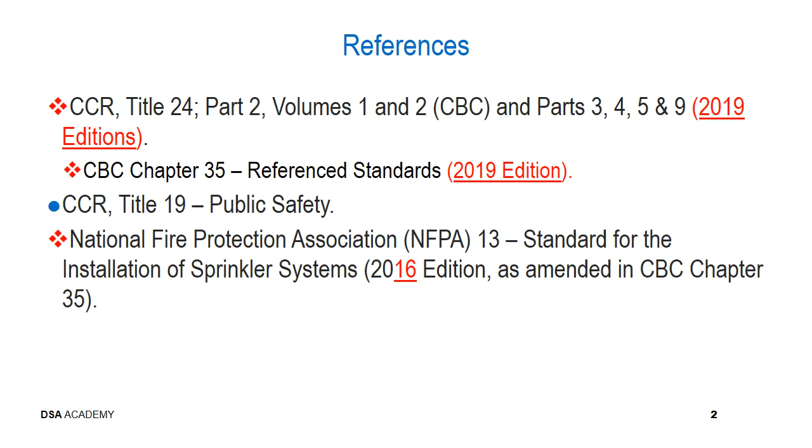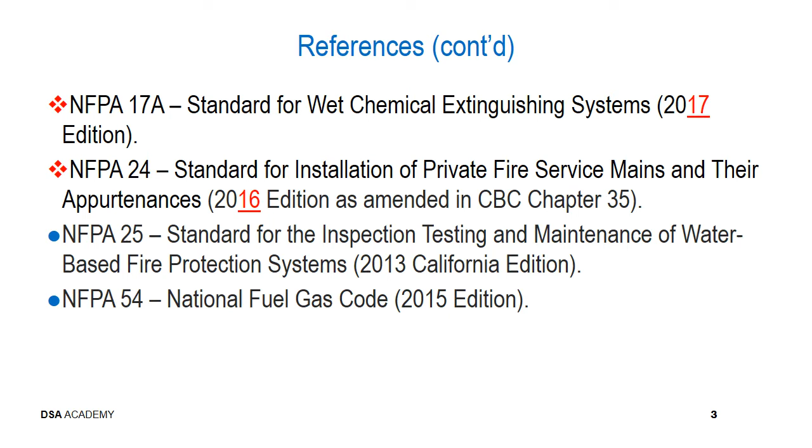There's also now an NFPA 17A, the standard for wet chemical extinguishing systems. There's a 2017 edition. For NFPA 24, the standard for installation of private fire service mains and their appurtenances, there's a 2016 edition, which is amended in the CBC Chapter 35, similar to the NFPA 13. With regards to the NFPA 25 and NFPA 54, those are the 2013 and 2015 editions.

There are some new editions for these remaining references. The NFPA 72 is a 2016 edition, and the NFPA 80 is a 2016 edition. And there's the NFPA 1142, that's a 2017 edition. Technically, NFPA 1142 is not officially adopted in the CBC, but it is recognized as a national standard in the industry.

Regarding the fire department's role, there's a document on the DSA FLS web page that deals with the roles and authority of DSA and the local fire authority and the state fire marshal. It would be good to have a copy of it and be familiar with the content. This is available on our website and can be pointed to should you have interactions with a local fire authority on a project in which they're asking questions about DSA's role for the construction on that project.

With regards to the 2019 CBC format, many of the FLS-related subject areas were reformatted to be consistent with the 2018 IBC. So at first glance, it may appear as if previous code provisions have been deleted, when in actuality they've been relocated to other sections or renumbered, similar to some of the other sections already covered. For example, many of the provisions formerly in CBC Chapter 14 related to exterior walls have been relocated now to Chapter 7.

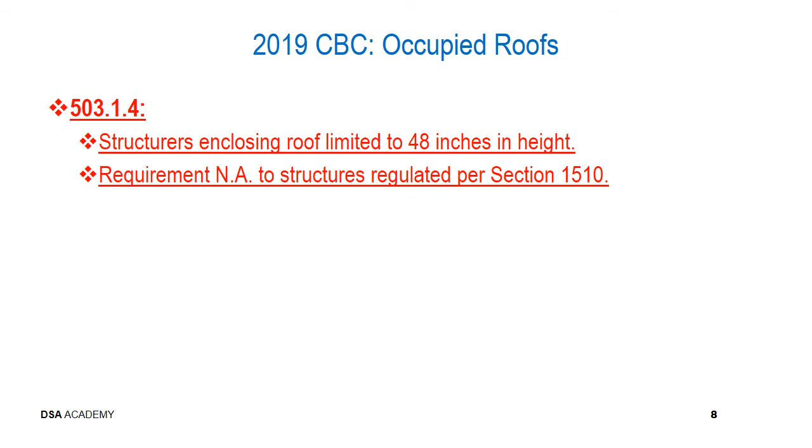With regards to marking and identification on rated walls, in 703.7, there's been no changes compared to the past code. Fire walls, fire barriers, fire partitions, smoke barriers, smoke partitions, or any other wall required to have a protected opening or penetration shall be effectively and permanently identified with signs or stenciling. Of course, the overall intent of this is to discourage installation of unprotected openings or penetrations in these rated walls.

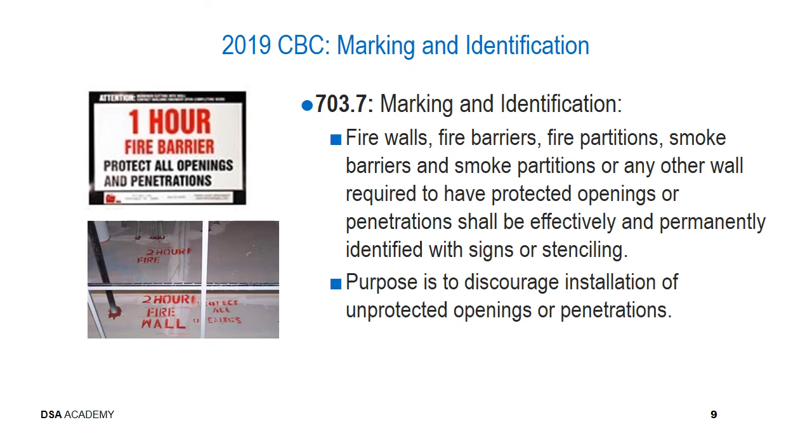The requirements for the frequency are the same as before. They're required at 30-foot maximum intervals and minimum of 3-inch letters. First, they identify the type of wall, and then the words "fire and smoke barrier - protect all openings" are required on the sign. These signs are installed to warn workers for maintenance and remodeling activities. A note must be in the specifications or on the plans indicating that this requirement will be met. You as project inspectors need to verify that it has been provided.

Continuing on with the marking and identification, this stenciling is required at all the accessible concealed spaces, and the wall type must be specified in this identification. It must state what type of wall it is, and must state that information previously mentioned about fire and smoke barriers and protecting all openings.

There are also requirements with regards to the text and font that's used. It's minimum 3 inches high with 3/8-inch thick stroke letters, color contrasting with the background. And we already talked about the spacing needing to be at 30 feet on center and 15 feet from the ends of a wall or partition measured horizontally.

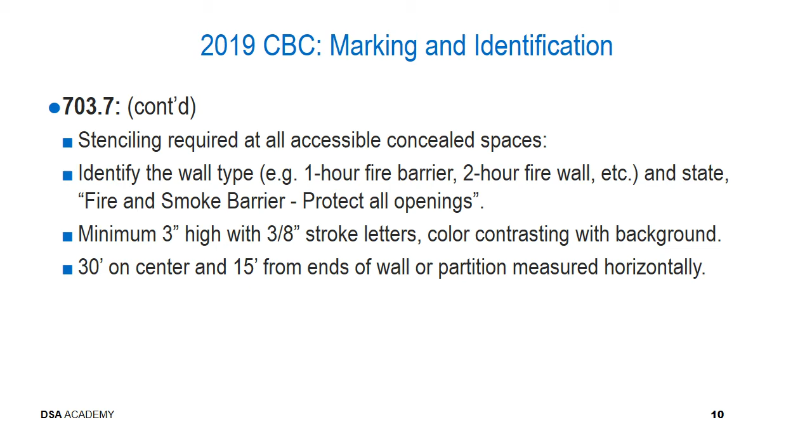With regards to secondary attachment to structural members and fireproofing or fire protection, 704.6.1, secondary attachments to primary and secondary structural steel members must be protected with the same fire resistive material and thickness as is required for the primary structural members. And this protection must be extended at least 12 inches minimum away from that primary structural member.

If those attachments are hollow and have open ends, then the fire-resistant material and the thickness must be applied to both the exterior and interior of that hollow attachment. We'll talk about this a little bit because of what it seems to imply. These new requirements clarify past uncertainties regarding whether fireproofing was required for these secondary members, and if so, how much, when those secondary members are connecting to primary ones that require such fire protection.

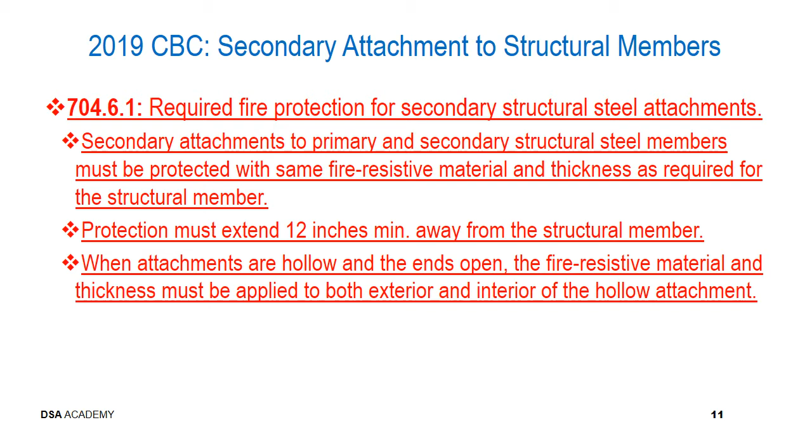Though the section indicates requirements for exposed open hollow members, how this will be practically implemented, specially inspected and tested, remains uncertain for small hollow members. Think about that. It's likely that contractors will elect to simply slap on an enclosure plate or maybe completely fill the opening with fireproofing to get away from dealing with those situations.

With regards to vents, 705.2.3.2, sealing at vents required in fire resistance rated exterior balconies or elevated walkway surfaces per section 2304.12.2.6. Any voids that are created at the exterior curtain wall intersections with balcony floors must be sealed to retard interior flame spread or hot gases or other products of combustion.

This new requirement is due to some fires over the last several years that occurred on exteriors of buildings that led to smoke and hot gases or other products of combustion that, unfortunately, entered the interior of the building through these vent spaces. Recall that 2304.12.2.6 requires vents of 1/150th of the enclosed framing area. So it was through these vents and voids at exterior curtain wall intersections with balcony floors, and this is what led to problems and therefore this new code requirement.

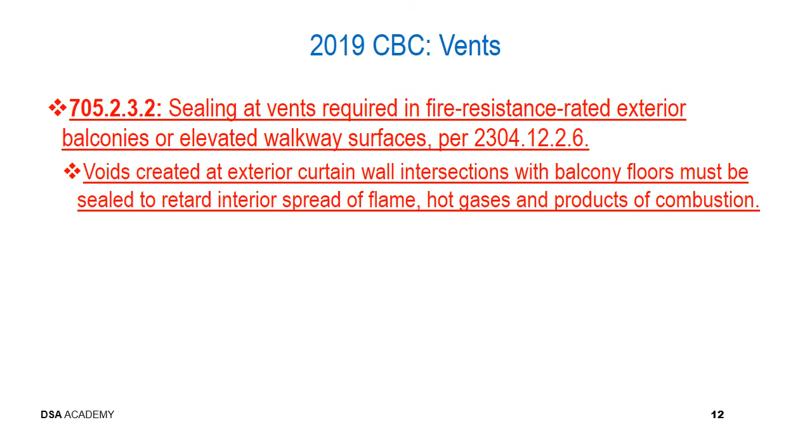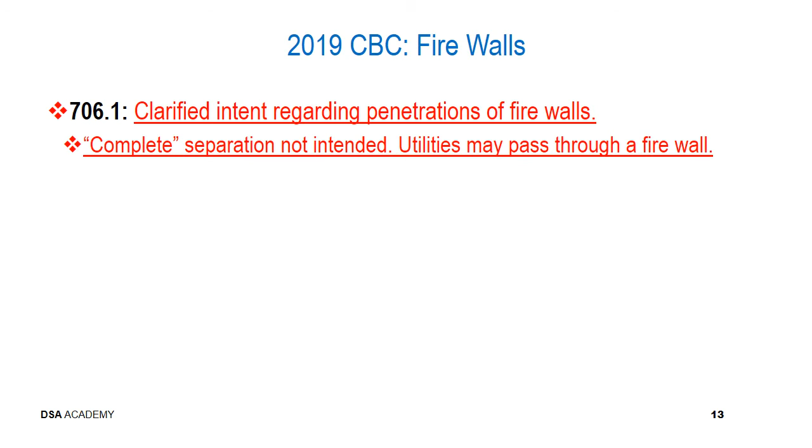With regards to firewalls, in section 706.1, there's been clarification regarding the intent regarding penetrations of firewalls. The term complete separation was not intended in the sense that utilities may still pass through a firewall. Apparently there was application of this code requirement related to complete that wasn't even allowing utilities to pass through in some jurisdictions, and that's not the intent. So this clarification has been provided now.

Regarding through penetrations in 714.2 and 1714.4.1.1, there's been some wording revisions. Through penetration firestopping assemblies are to be installed as tested. When it uses that wording as tested, that equals as installed. That's the intent here. So as installed and as tested must be the same.

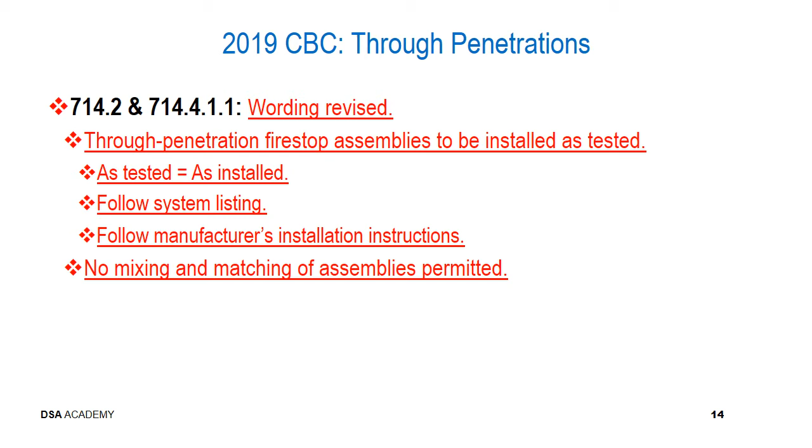They also need to follow the same listing as what's specified for the particular product. And of course, following the manufacturer's installation instructions is required. There cannot be any mixing and matching of assemblies.

Regarding membrane penetrations, 714.5.2 now has a new exception, number 8. This exempts protection for penetrations by listed luminaires or luminaires protected by listed materials tested for use within that assembly. However, they must be installed per the listing instructions. So if you have those on your projects, make sure that you have access to those listing instructions, which include the installation requirements, to verify compliance.

With regards to fire alarm testing provisions, section 901.6.2, integrated fire testing, this is generally going to be applicable when there are 2 or more life safety systems that are interconnected. This is to address the system response that must be verified when required testing of the initiating system is to be conducted. It's intended to verify the response of subordinate fire protection and life safety systems.

Testing is actually required to occur prior to occupancy. The hierarchy of testing components or component systems in complex systems is recognized such that retesting is only required for failed components, not the entire complex system. These are generally going to be seen in high-rise buildings and buildings with smoke control systems because they must comply with the noted NFPA 4 standard, which is the standard for integrated fire protection and life safety system testing.

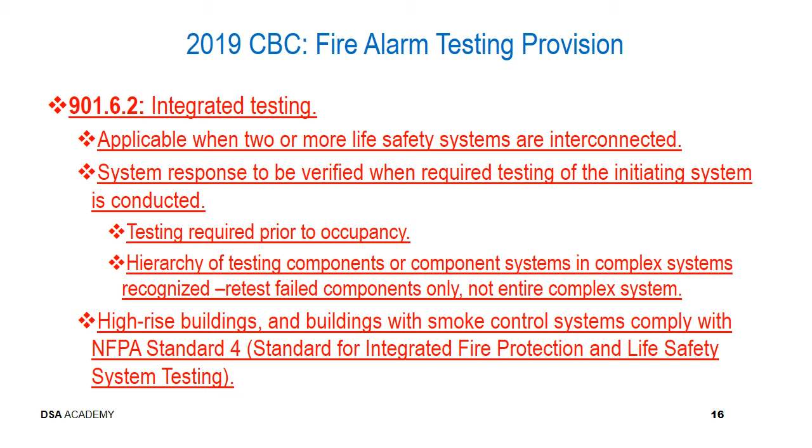For exit discharge illumination, in 1008.2.3 regarding exit discharge illumination, the entire exterior egress route from each building point of discharge through to the public way is to be provided with normal egress illumination. That's something that needs to be provided. This illumination to a public way is not required when you have these 2 items here. First, the building exit discharge is to a safe dispersal area, and 2, the safe dispersal area is illuminated at not less than 1 foot candle at the walking surface.

The emergency or secondary power source is not required. These requirements are to ensure that occupants can see where they need to go when exiting a building in a panic situation. The normal egress illumination to the public way is not required if a safe dispersal area exists and has sufficient lighting.

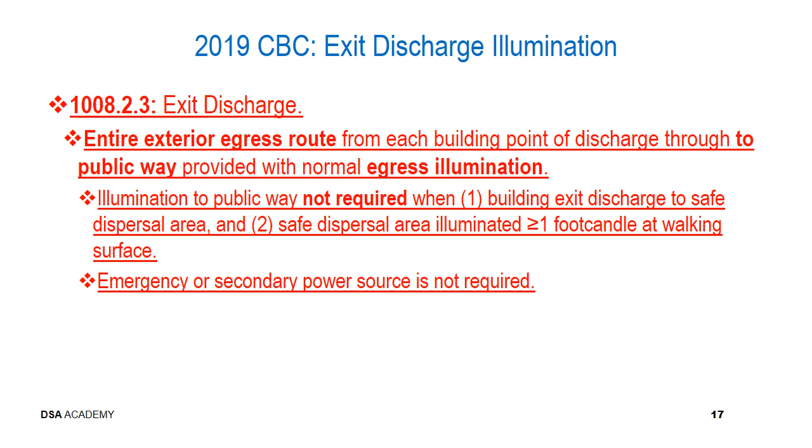Regarding door hardware requirement changes, in 1010.1.4.4, there's locking arrangements that are applicable in educational occupancies. This would be for both Group E and B situations that are educational in nature. These locking arrangements need to allow locking designed to keep intruders from entering a room. These locking arrangements must be capable of being unlocked from outside the room with a key or other approved means. Doors must be openable from within the room.

Modifications are not permitted to any listed panic hardware that's associated with these doors, so this locking hardware, and the fire exit hardware or door closers. This is to address some of the sad situations in which there's been some school violence occurring.

Continuing on with these door hardware requirements in 1010.1.11, Group E, lockable doors from the inside. This applies to new state-funded kindergarten through 12th school buildings, and this requires rooms such as classrooms, offices, and so on with an occupant load of 5 or greater be equipped with interior locking hardware. It gives the staff the ability to engage the locking function from inside the room without having to open the door in the event of a lockdown. This section reflects requirements contained in Assembly Bill 3205, which became effective back in January 1st of 2019.

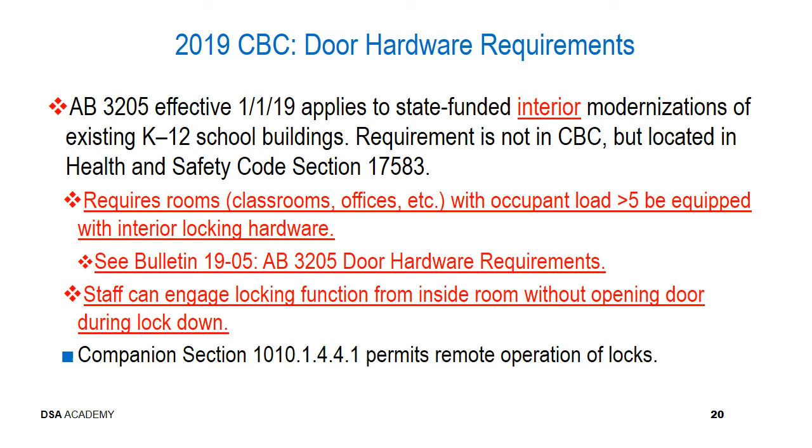Emergency elevator communication is covered in section 3001.2. The requirements related to the emergency elevator communication system have been revised. The two-way communication must now be visual and text-based and a video-based 24/7 live interactive system. It must be fully accessible by the deaf, hard of hearing, and speech impaired, and shall include voice-only options for hearing individuals. There must be the ability to communicate with emergency personnel utilizing existing video conferencing technology, chat text software, or other approved technology.